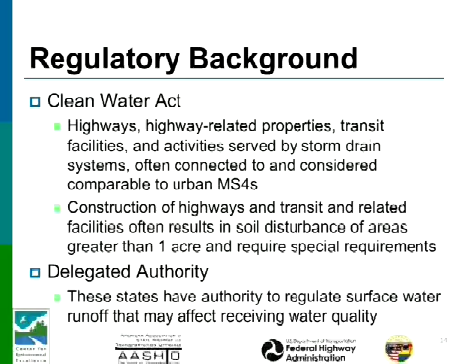Construction sites are also regulated by the Act. Construction of highways and transit and related facilities often results in soil disturbance of areas greater than 1 acre, and that requires special requirements under a separate NPDES permit. And lastly, a quick word about delegated authority. Most states have been delegated authority to regulate surface water runoff that may affect receiving water quality under the Clean Water Act. The U.S. EPA acts in an oversight role in these states, and currently only 4 states do not have full Clean Water Act authority.

The 1987 amendments to the Clean Water Act required that MS4s, including those owned by transportation agencies, obtain stormwater discharge permits, effectively designating them as point source discharges. By definition, a source that is permitted under an NPDES program is a point source. Non-point sources, such as silviculture, do not have coverage under an NPDES permit.

As mentioned previously, the U.S. EPA implemented the NPDES program in 2 phases, depending on the population of the municipality. Transportation agencies are considered a municipal permittee, even though a population metric does not apply. Accordingly, all transportation agencies are covered by either a Phase 1 or Phase 2 NPDES permit for stormwater discharge. Many transportation agencies are entering into a 4th round of Phase 1 permits that are issued on a 5-year cycle. However, some agencies have entered into the permitting system only relatively recently under Phase 2 of the program.

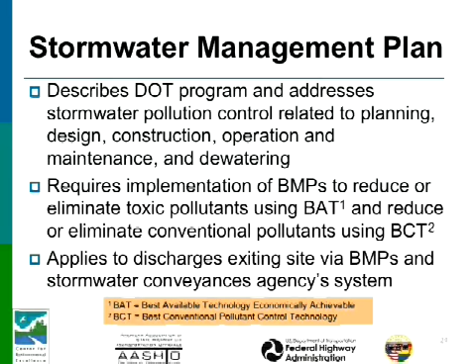So, switching gears to key issues to consider, the handbook's key issues section serves as a good reference check to ensure that your program is comprehensive and considers the elements necessary to make it comprehensive. You can see here the key issues to consider for the program framework. Primary among them are the SWMP and a management structure to ensure implementation.

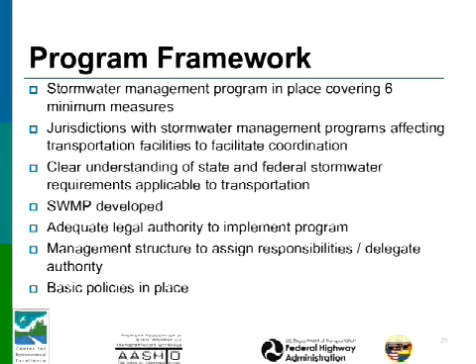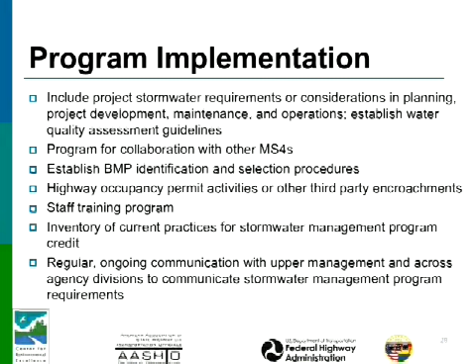Some of the more important elements for program implementation are collaboration with the MS4s. This can greatly leverage resources for additional effect. Collaboration with MS4s for TMDL compliance will be increasingly important to DOT programs. Perhaps the most important implementation element is communication and buy-in with upper management. A culture of environmental stewardship within the organization is very important to get the most from the DOT stormwater program. Good communication and tracking of compliance costs are good ways to ensure good collaboration with management.

Operation and maintenance can sometimes be overlooked, but it is one of the most important elements. An ongoing inspection program to ensure slopes are stable can be beneficial, and a tracking system for post-construction BMPs owned and operated by the state is essential. GIS tools can greatly facilitate BMP tracking and maintenance efforts and pay dividends when developing an annual report.

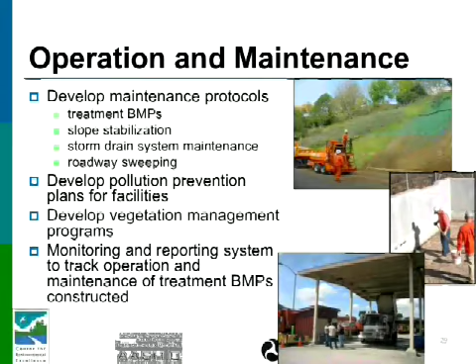So next, Scott will touch on potential compliance pitfalls and practical tips. Scott? Okay, thanks, Anna. The EPA is currently conducting audits of DOT programs nationally. Some common deficiencies noted in these audits include compliance with construction general permit requirements on construction sites, disposal of maintenance waste and the operation of maintenance facilities, the uniform implementation of stormwater management plan requirements across the state, conducting general inspection and enforcement, and implementing the IDDE program that I mentioned previously.

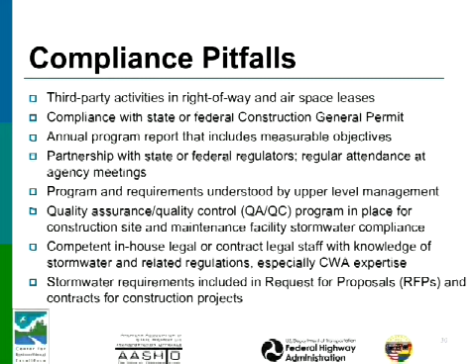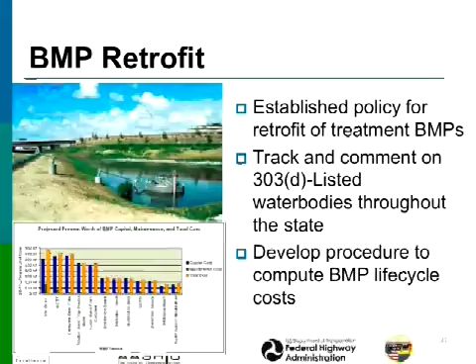BMP retrofit, whether alone or in association with 3R projects, is a major undertaking for DOTs. Retrofit of stormwater controls is relatively costly compared to building controls as part of new construction, particularly if right-of-way acquisition is involved. The DOT should establish a policy on BMP retrofit that includes approved BMP types, the access requirements, minimum treatment area requirements, and right-of-way acquisition guidelines.

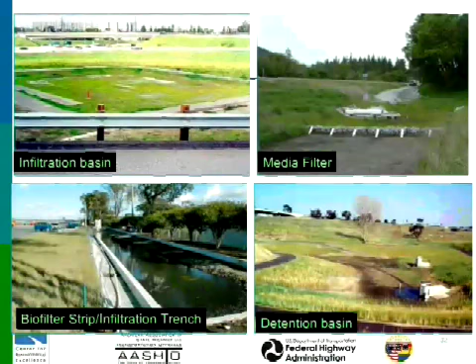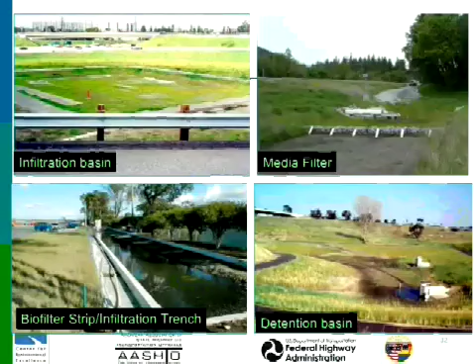Here's just a few DOT examples of treatment BMPs that are retrofitted within the highway environment and support facilities. The BMPs shown here are all retrofits. The infiltration basin and the detention basin are within highway interchanges. The media filter is in a park and ride lot, and the infiltration trench in a highway maintenance station.

We cover some of the minimum expectations of the U.S. EPA here and descriptions of how to address them using the structure of the 6 minimum measures introduced in the overview section. Since most states are authorized by the EPA to administer their own permit program, there is substantial variability in the precise expectations of each state. So for specific information, consult with your local permitting authority. There's a current NCHRP research program reviewing the various DOT NPDES permit types. This project may also be making recommendations relative to DOT permitting.

Agencies, as I said earlier, hold either Phase 1 or Phase 2 permits. Stormwater management may be required on all projects statewide or just in urbanized areas. Some agencies are permitted by district or region, with each district possibly having unique and separate requirements. Many agencies are co-permittees with local jurisdictions. An agency may also be covered under multiple NPDES permits, either alone or as a co-permittee with other agencies or municipalities. Consequently, each agency needs to consider their specific situation regarding the level of implementation for each of the measures that we've shown here.

We talked previously about the benefit of leveraging public resources for public education. A consistent message transmitted from multiple agencies in the state will have a much better effect in modifying public behavior. A national DOT anti-litter campaign may be worth exploring as a logical extension of this type of approach. Advertisers know that repetition is the key, as well as targeting the correct demographic in the local population. Your program effectiveness assessment should continually refine this element.

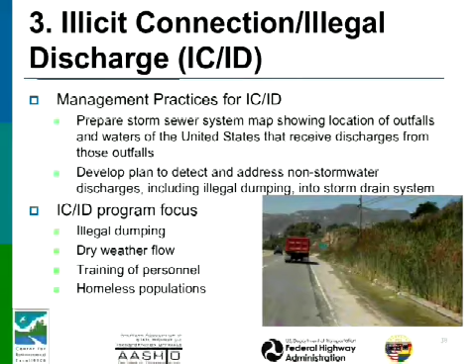The EPA expects transportation agencies to develop, implement, and enforce a program to reduce pollutants in stormwater runoff from construction activities. Construction runoff from highway activities can present many special challenges due to the linear nature of projects, which result in numerous discharge locations at crossings of watershed drainages. In addition, the site constraints of working within a limited right-of-way can make implementation of many of the common erosion and sediment control measures difficult.

As mentioned, new effluent limit guidelines recently adopted by the U.S. EPA will create a challenge for DOTs in the future. ELGs include a new numeric turbidity guideline that will require extra vigilance to meet in areas, especially those that have high silt and clay content. The North Carolina State University Department of Soil Science has an extensive program investigating various ways to reduce turbidity from highway construction sites. More information on this can be obtained at their website.

The Federal Highway Administration has adopted AASHTO Highway Drainage Guidelines, Volume 3, titled Erosion and Sediment Control in Highway Construction, dated 1992, to be followed on all construction projects funded under Title 23 of the U.S. Code. These guidelines do not preempt any requirements made by state law where such requirements are more stringent. However, according to the guidelines, federal aid funds shall not be used in erosion and sediment control actions made necessary because of contractor oversight, carelessness, or failure to implement sufficient control measures.

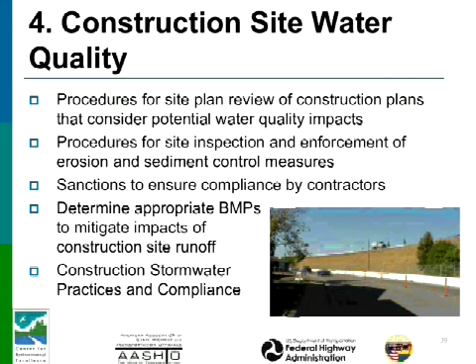Stormwater requirements may also be included in requests for proposals and contracts for construction projects so that expectations for controlling pollution are known early in the process. Construction stormwater practices and compliance is especially important for transportation construction projects as they're generally large, very visible to the public, and can be nearby sensitive receiving water bodies. Next, I'm going to turn it back over to Anna to discuss practical tips on post-construction water quality requirements.

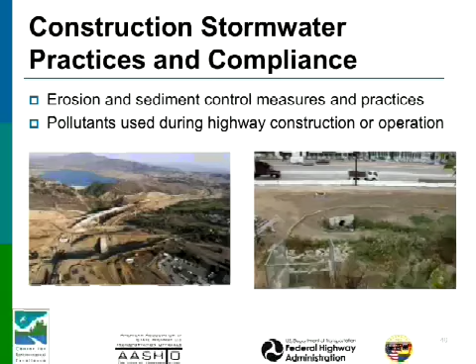Okay, continuing on to practical tip number 5 on post-construction water quality. Some of the largest differences in stormwater practices of transportation agencies are related to the management of post-construction stormwater quality. Some state transportation agencies, such as New Hampshire DOT, Washington State DOT, Maryland State Highway Administration, and Caltrans, require the implementation of approved stormwater treatment systems in all new projects where feasible.

An emerging issue is hydromodification, the change in downstream hydrology due to the addition of impervious surfaces and the change in channel geomorphology. In addition, stormwater regulation is moving toward low-impact development approaches that emphasize pre- and post-project rate, volume, and increasingly pollutant load balance. Typically, vegetated systems are preferred, and infiltration, which is not always compatible in the highway shoulder, is emphasized. More research is likely needed to focus on LID approaches that are suitable in the right-of-way for various climate zones. WSDOT has developed several innovative practices, and DDOT is retrofitting urban areas with LID-type measures.

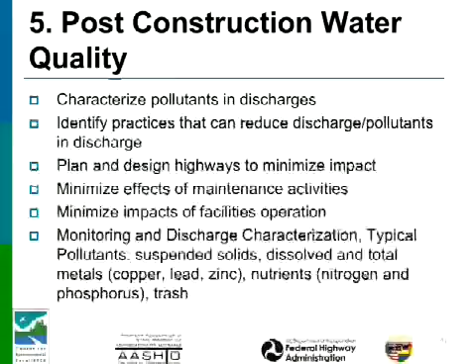Best management practices to reduce the discharge of pollutants in stormwater include both structural and non-structural measures. Structural BMPs are facilities or devices that are engineered and built to capture and treat stormwater runoff, also called treatment BMPs, while non-structural BMPs include a variety of non-constructed measures or activities to reduce the generation of pollutants from highways and related facilities. A transportation agency may develop an approval process for BMPs that are shown to be effective for the constituents of concern in its runoff and compatible with its facility operations and maintenance practices. This approval process could also apply to construction site BMPs.

The selection of structural BMPs for highways is different from that for municipal systems, since there is generally less right-of-way and maintenance access is more difficult. Controls that can operate passively and where deferred maintenance is not a problem are preferred. The International Stormwater BMP Database identifies BMPs that are effective in removing constituents of concern from stormwater runoff.

Other good reference publications for treatment control design and application include National Cooperative Highway Research Program, or NCHRP, Report 565, Evaluation of Best Management Practices for Highway Runoff Control, the FHWA publication titled Stormwater Best Management Practices in an Ultra-Urban Setting: Selection and Monitoring, and the FHWA publication on Evaluation and Management of Highway Runoff Water Quality.

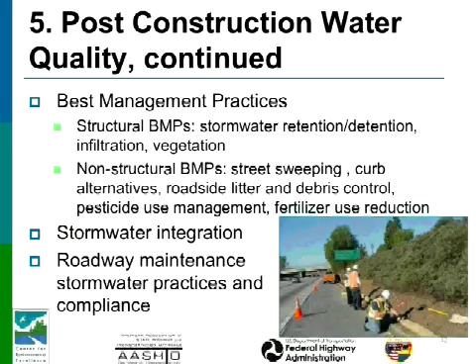It is helpful to develop water quality assessment guidelines to provide a consistent basis to assess the project impact on receiving waters during the initial environmental assessment for the project. Formal water quality assessment guidelines will ensure that environmental planning staff are aware of potential stormwater quality impacts and will create appropriate mitigation measures for the project.

Practical tip number 6 on pollution prevention and good housekeeping. The operation of highway maintenance yards can lead to the discharge of pollutants in stormwater runoff as well as through non-stormwater discharges. As mentioned earlier, maintenance facilities can have compliance issues. Make sure each facility has a Facilities Pollution Prevention Plan, sometimes referred to as FPPP, and that the staff at the facility are trained regularly. Routine inspections should be completed to ensure that potential pollutants are covered and contained.

Pay particular attention to wash rack areas and where the drainage from the wash rack goes. It should not be plumbed directly to the site storm drain, but preferably should be covered areas with wash water directed to the sewer. Alternatively, the discharge can be directed to a BMP that is effective in removing sediment and oil and grease. Equipment maintenance should be performed indoors, and leaking equipment parked outside should be repaired.

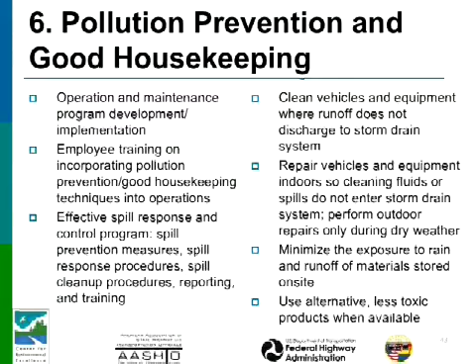Special and other requirements specific to total maximum daily loads, or TMDLs. The Clean Water Act requires states to determine existing and potential beneficial uses of waters and to evaluate whether their current water quality supports these uses. When the water quality will not support the designated beneficial uses, a TMDL is developed that apportions the maximum amount of the pollutants the water body can safely assimilate to all dischargers in the watershed, including transportation agencies. Under the Clean Water Act, Section 303(d), states, territories, and authorized tribes are required to develop lists of impaired waters.

The law requires that these jurisdictions establish priority rankings for waters. TMDLs are becoming a significant part of the DOT's stormwater programs. Load allocations for various constituents may require the retrofit of treatment BMPs and existing infrastructure. It is imperative that the DOT is involved early in the TMDL process to ensure parity in the development of load allocations and provide lead time to develop an agency-specific implementation plan.

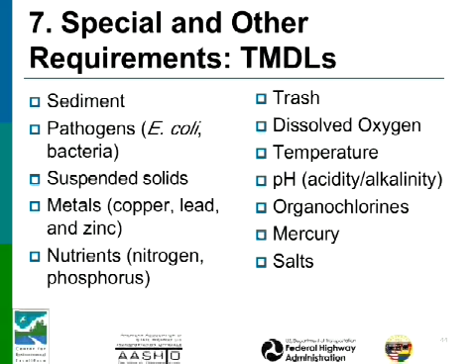Integrated planning is also essential. Make sure you understand that other TMDLs may be developed in the same watershed in the future to allow the retrofit of BMPs that can meet the load requirements for all anticipated constituents, if applicable.

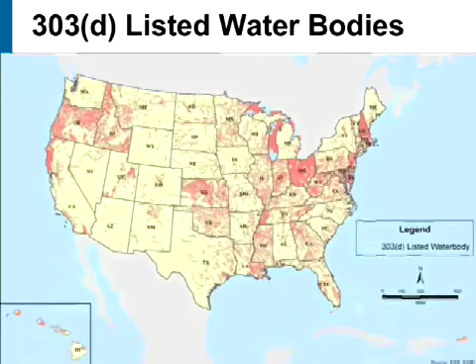This slide shows the 303(d) listed water bodies in the U.S. currently identified as being impaired. Over the past 10 years, the number of listed water bodies has approximately doubled. This is expected to continue as more and better monitoring information becomes available. And once on the 303(d) list, a TMDL, or total maximum daily load plan, is developed.

Construction sites may also have to meet the requirements of TMDLs. New construction general permits may incorporate certain constituents by reference. So review your general construction permit language to determine the status. Construction projects may also be subject to Section 404 and 401 requirements, which also include water quality conditions to be met.

If you are named as a stakeholder in a TMDL or think you may be, a basic checklist for TMDL processes: identify activities required under the agency's stormwater permit. Track the state's 305(b) report, which is the state's water quality assessment and constitutes a potential watch list for water bodies that may become listed as impaired or included in the 303(d) list. If a water body into which the agency's facility discharges becomes listed, determine if the agency's discharge contains the constituents of concern and in what concentration.

Participate in the Section 303 delisting process, and provide the regulatory agency with data regarding the quality of the agency's discharge for the constituents of concern. Participate in the development of the implementation plan. Avoid plans that set arbitrary and non-technical reduction goals. An assessment of the water quality standards may be appropriate. Avoid implementation plans that do not allocate loads to each NPDES permit holder or stakeholder. It is important to have a quantified load allocation. Some implementation plans leave it up to the dischargers to develop load allocation.

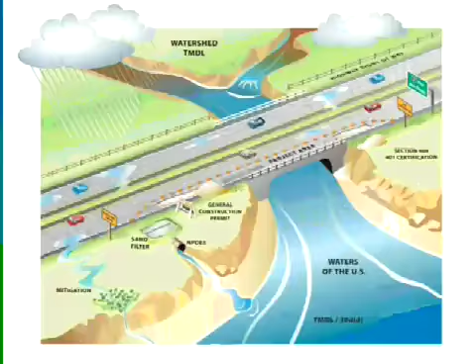Regarding program development, developing the SWMP in consultation with the various divisions within the agency is highly recommended to ensure that the requirements have an owner and are compatible with existing work practices. Similarly, the SWMP can also be developed in consultation with the regulatory agency to streamline the approval. Regulatory agencies are not always familiar with the unique requirements of linear infrastructure and transportation. The plan development process within the regulatory agency may also need to include information regarding project planning, design, construction, and operation.

Failure to develop and implement a SWMP, or stormwater management plan, can lead to violations of the Clean Water Act and may be subject to fines, lawsuits, and substantial delays in project implementation.

Documentation and record keeping. Most stormwater permits require the submission of an annual report documenting the activities undertaken by the agency during the past fiscal or calendar year to reduce the discharge of pollutants to receiving waters. It is therefore helpful to keep detailed records describing all the activities that were conducted during the year to improve water quality, as well as activities that impact water quality and any improvements that were made from the previous year. The use of a database to collect information needed for the annual report on a real-time basis is highly recommended.